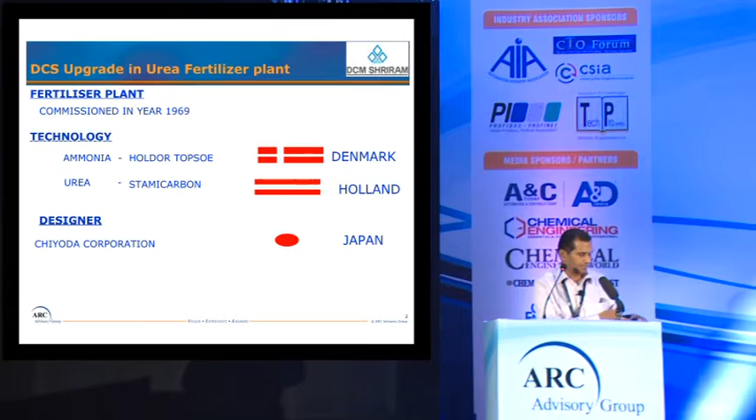As I already told you, it started in '67 and we started production in '69. Those who are aware of the fertilizer industry know we have a hydrolyzer section also. So in the year 2000 we installed a small DCS in that particular portion, and the majority of the field transmitters and control room instruments were pneumatic.

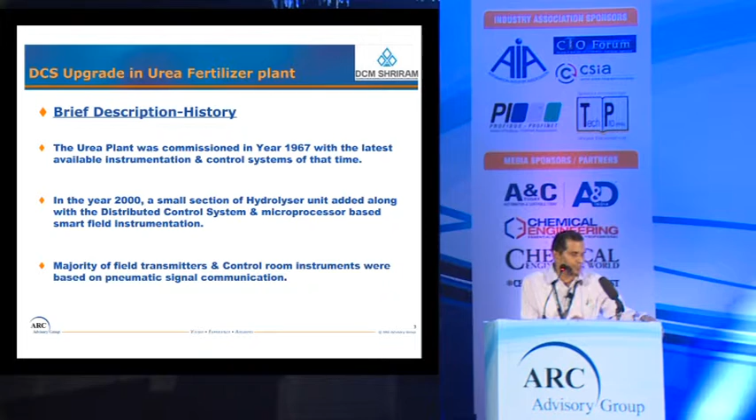Now, what were the limitations? Let me be very frank with you. Other than the field instrumentation — because we were not having spare parts for them — otherwise we didn't have any problem. Local controllers were there in the field. The only thing missing was the diagnostic features which we talk of nowadays.

And the most important problem nowadays is the new instrumentation engineers, because now instrumentation is not purely an instrumentation branch, it is more towards IT. That's what we've been listening to from yesterday's first session till today. So new engineers all want white collar jobs — they don't want to go into the field to attend to these things. These were the kinds of issues existing before 2013.

And of course, the problems you could read on the slides are the natural problems, whether it is pneumatic, or electronic, or microprocessor based, or the instruments which are coming nowadays.

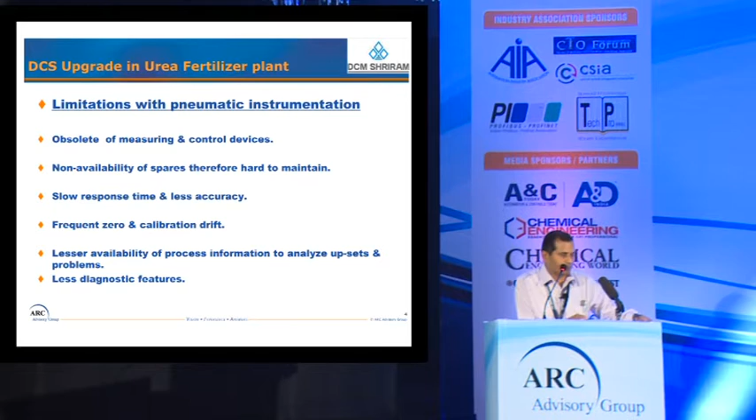So in the year 2013, when DCM Shriram thought of upgrading it, because of the limitations we just saw — now, whenever you upgrade the system, it is not only the instrumentation team which faces the problem. As yesterday that NTPC madam was telling about the manpower — the same condition exists here also. In 2017-18 the majority of our people will get retired in our company also.

So maybe 700 to 800 years of man experience will go. And then how plant operations are going to happen — because running a fertilizer plant is not an easy thing. You have to have deeper knowledge because you're dealing with ammonia, and it is very dangerous.

So what was done was a cross-functional team was made, first of all, to understand it, which consisted of process, instrumentation, and electrical engineers.

Then what we did is — the documentation part, nowadays you have all soft copies available with you, but those were the days when it was only made on tracing sheets, and you had to rub with a blade if you had to make any changes. Those sheets are of course available now as soft copies after taking photographs. So all those drawing sheets were taken out, which were there as commissioned, to see what was the actual project status at that time.

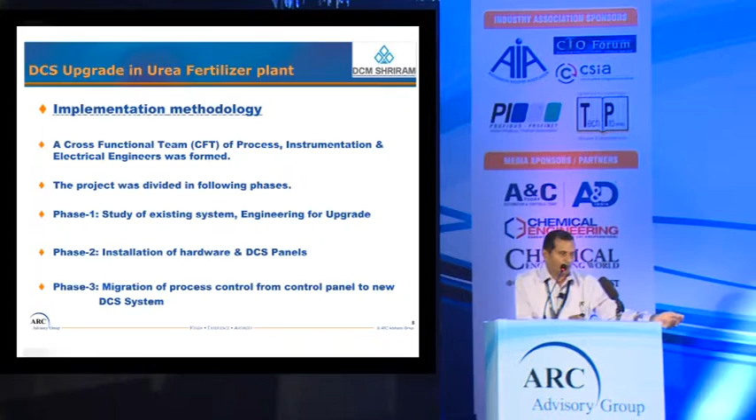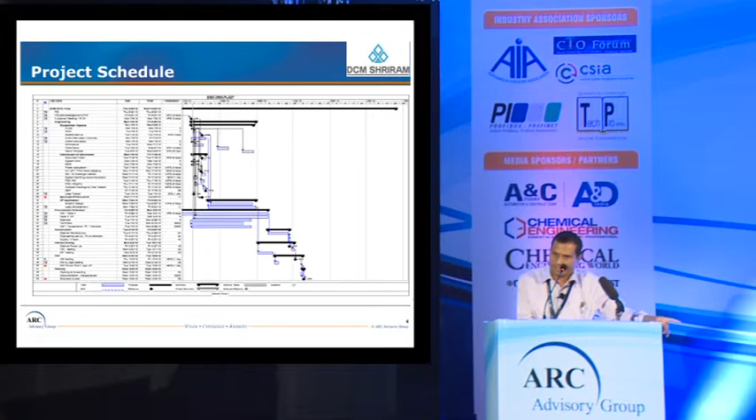Now I will show you how we did it. A very detailed project schedule was made, although you may not be visible line by line, but from the day one when the indenting was done, till the last date when we will be handing it over. The schedule was quite large, because we were not stopping the plant even for a single minute. The urea production was all the time over there.

Now what we did, as I told you, we took out all P&ID diagrams, all drawings, all safety interlock schemes, because those were the relay-based interlock schemes. It is not like nowadays where you can take a picture, take a graphics out of your monitor, and then accordingly change it.

Then we had to prepare the specification for the new instrumentation. Then the cable routing - if you are making a new plant, you can always have access wherever you want, you can route the cables, wherever you want to put junction boxes, you can always put. But when you are going for the upgrade, you have to see the actual condition of the site and how to implement those. Then we had to prepare a detailed IO list and the assignments thereof.

And then what we did is, we actually interviewed the plant operators. See, there are things when the plant is being operated from the big control desk, they have got a habit of operating at the same time. They will go to that desk, 3 people will stand, one will push one button, another will see those pneumatic recorders. They have got that habit of running a plant, so they have it in their mind how to coordinate to run a plant. So what we did is, we interviewed the people from the urea process side, and we even interviewed those people who were actually posted in the field for small sections, just to have a feeling of what kind of things they think they should have whenever we go for the upgrade. That was the important part which we did.

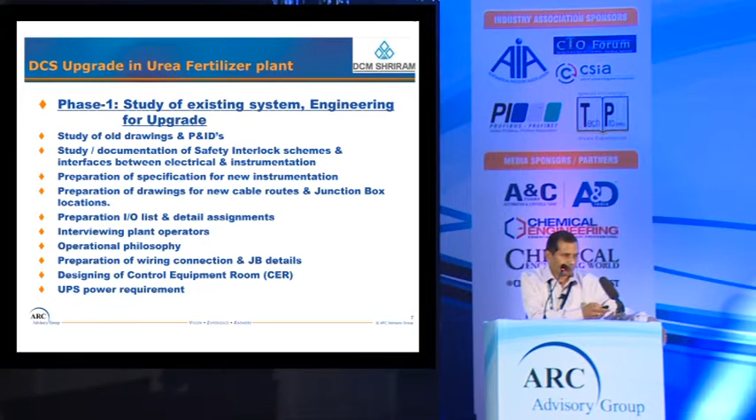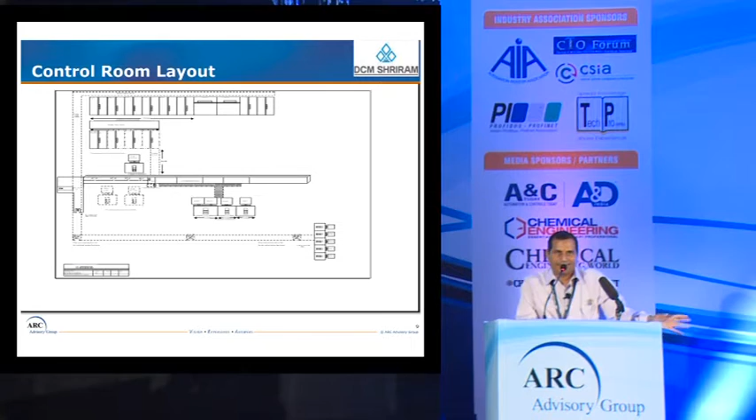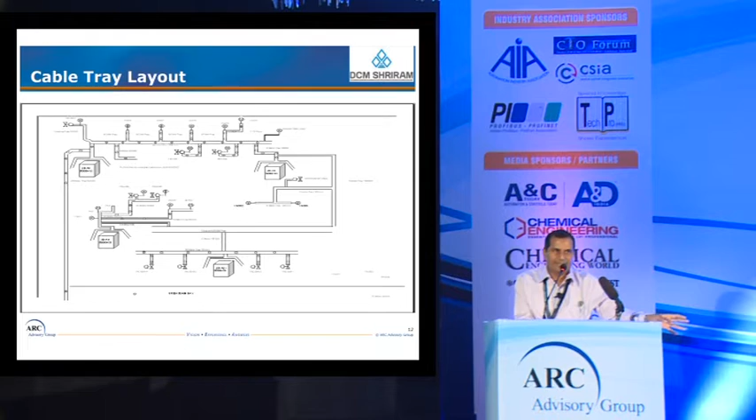What we did is, we had a very in-depth study of the overall plant, and then we prepared the cable tray layout, because that is very, very vital. You see, instrumentation signal cables cannot run in parallel with high voltage electrical cables because of interference. So keeping that in mind, we had to prepare a cable tray layout very meticulously so that we don't have any kind of interference.

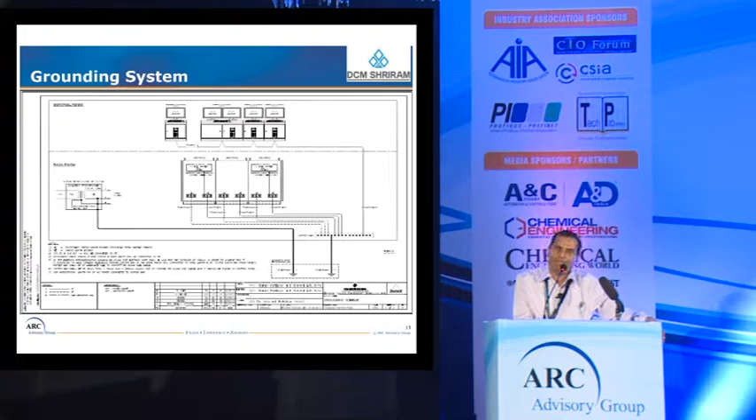Then we had to prepare the electronic grounding scheme because the new system was there, and this time we went for a chemical grounding.

Then after indenting the DCS, we had a hydrolyzer section. The X vendor already had a DCS in the urea plant, while in the ammonia plant we had a DCS from Y vendor. The question came whether to go with the X vendor already working in the hydrolyzer section of the urea plant, or the Y vendor already working in the ammonia plant. The urea plant operators were acquainted with that small portion of the hydrolyzer, so how to go about that?

We had very detailed discussions with both vendors, and ultimately we took an important decision: we took the X vendor system out and went for the newer Y system, which was already existing in the ammonia plant.

We had already decided that since we had to run the plant with the upgradation and replacement in running condition, the FAT had to have very stringent conditions, because after installing and starting the plant, nothing should fail. So a very hard FAT was done at this site. Normally in newer plants you get a lot of time to do the FAT comfortably, but here time was not the constraint - the constraint was the accuracy with which the system was designed.

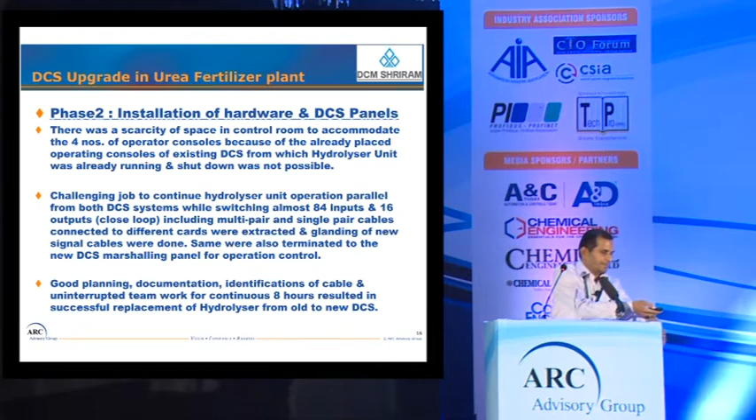What we did is we started the exercise at 9 o'clock in the morning after tea was finished. From 9 o'clock we took almost around 8 hours. We did not allow anybody - from process, instrument, or electrical - to go out for anything else. We arranged everything inside the control room, and the hydrolyzer section was successfully changed from the old DCS to the new DCS.

Mind it, the operator console was still the older one - we had temporarily installed a new operator console for the new DCS. Then the rest of the exercise was since pneumatic, we had to do it very meticulously. What we did is, we posted people.

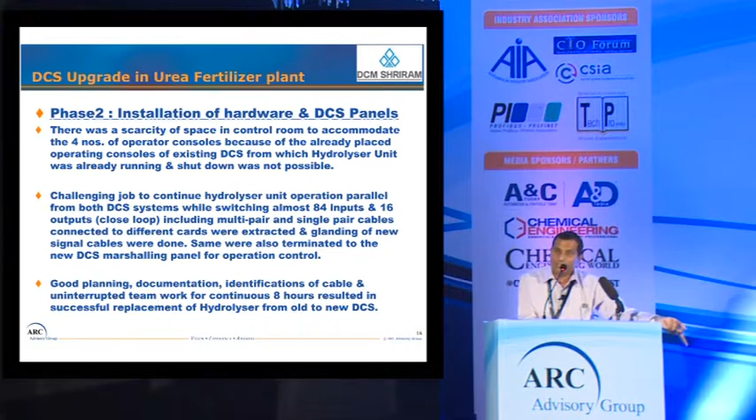Suppose one closed loop was being changed - we posted one person at the site. All wiring was already done for the electronic transmitters, even cable lugging and tagging was done. We would just change the wire, take the control valves on the hand jack, immediately change it, and the fine tuning was done at that same moment. This is how it was done.

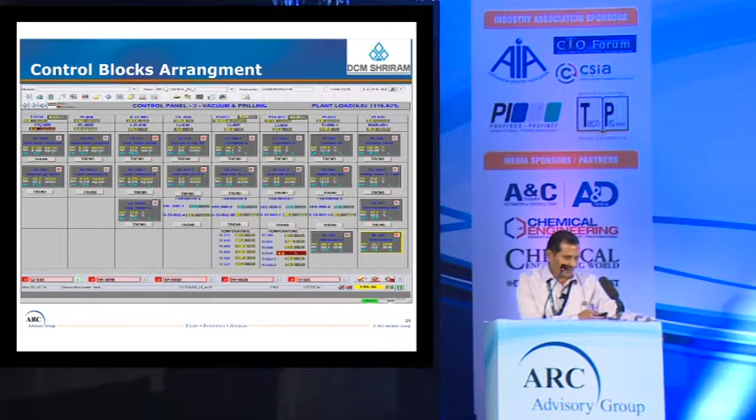This is a graphic of something looking like an old control desk. Lots of blocks are made - these blocks are something like a control desk having the indicators, the recorders, or the local controllers, giving the feeling of the newer one.

Now this was the newer one, the graphic of the previous slide, so we had to make such kinds of graphics. Why I'm telling you this is, both kinds of manpower are there - the newer generation operating the plant are more comfortable with this kind. Of course, we had to give them training, and they were there at the FAT time also. The previous slide I had shown you was having a graphic showing the control desk feeling.

Now slowly the previous slide has gone - they are not opening that particular graphic anymore. They are working with this kind of graphic only.

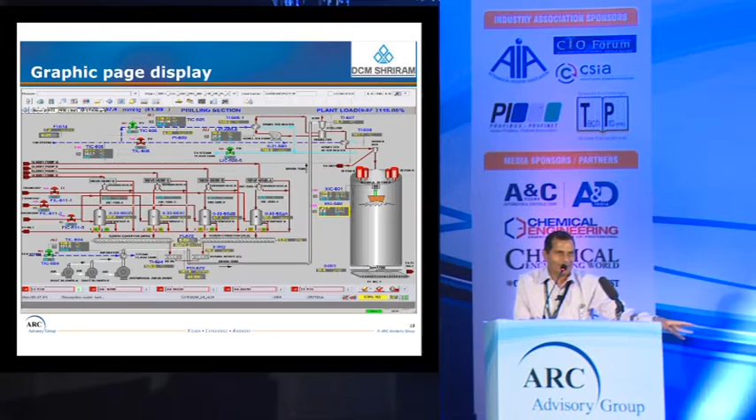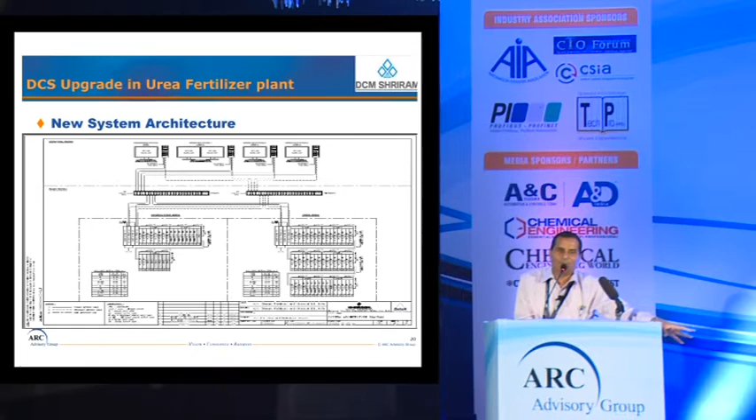Now this is a kind of DCS architecture which we had actually made. And what we did is, we give one independent operator console to the shift in charge. Shift in charge is an old person having experience of more than 30 years in the plant, so he knows both the things. And the newer generation were giving the dual monitors so that they can operate from there. I will show you a picture of that also.

Now these people are so happy, even the older generation, that now they are not looking towards the old graphics. So why I have presented this is that while we are going for the newer automation system, big databases, analysis of that, running a plant more efficiently - see, it is a very, very energy intensive plant.

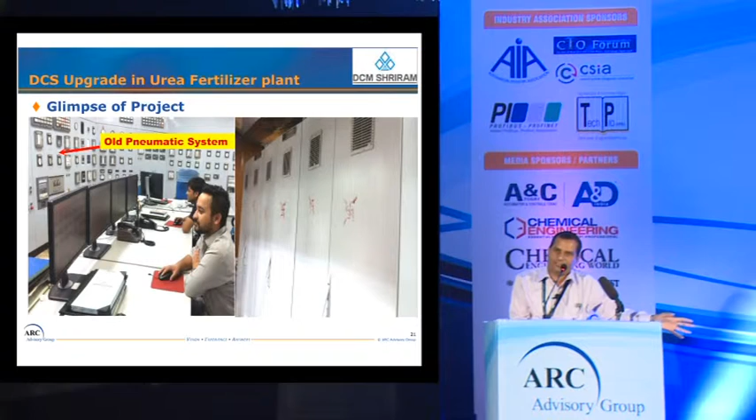Now we have taken Windows 7. God knows what Windows is going to come after 3 years, 4 years. And the answer from the DCS vendors is very simple: Sir, please change it, please replace it, we cannot support you. They will say, okay, we support you for 10 years, 15 years, but we cannot guarantee you about the operating systems. If XP is changed to Windows 7 or Windows 8 or Windows 9, we cannot help you out. Now, it's not a simple replacement of only the monitors and PCs. You have to change the DCS because the newer generation of DCS versions are not compatible with the older ones. So you have to replace it. So that is the main challenge.

And I think my other friends who are from the end user side, they are also facing the similar kind of problem. Because instrumentation cost is roughly 3 to 4%, but it is the most important one in any plant. They are the last one to enter, and the fastest results are expected from them.

If any shutdown is taken, they are the last ones to be given the job, because when the main equipment will be taken out, then only you will be allowed to take out the instruments. And when the equipment will be again installed, you will be the first one to install it back. So always urgency, urgency, and urgency. And all kind of information should be always available. They are the first one to be given that information in the control room, whether you are ready or not. We are not able to start the plant because you are not given us the temperatures, please do it fast. So this is the kind of challenge which I think the instrumentation guys, they have got a Herculean task of putting the system back.

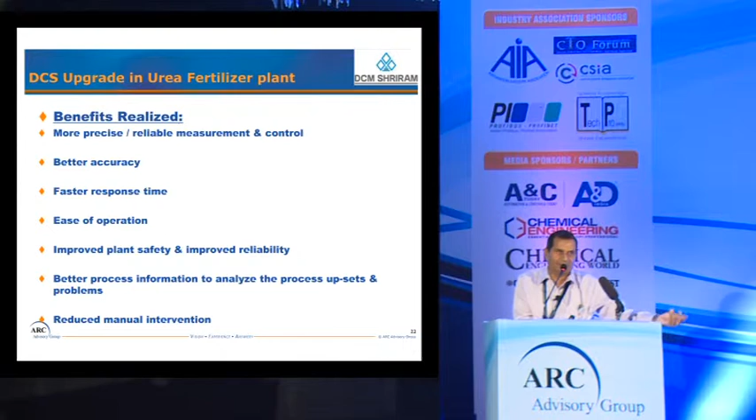But one thing is taken sure, that the deviations to the set point, which a pneumatic system has got, you can certainly reduce that band. Once that band is reduced, it means less jerk to the main equipment, and certainly their life gets extended. Thank you very much, I'm well within the time.